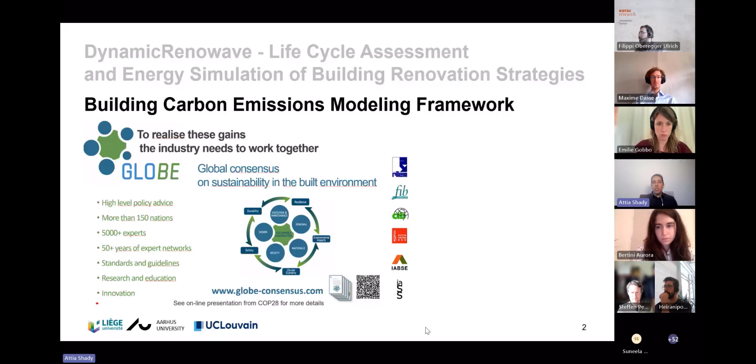Now allow me to give some idea of where we are going and where we are coming from. Like I mentioned earlier, we had our webinar in May where Professor Petersen and myself presented the framework in one of its earlier drafts.

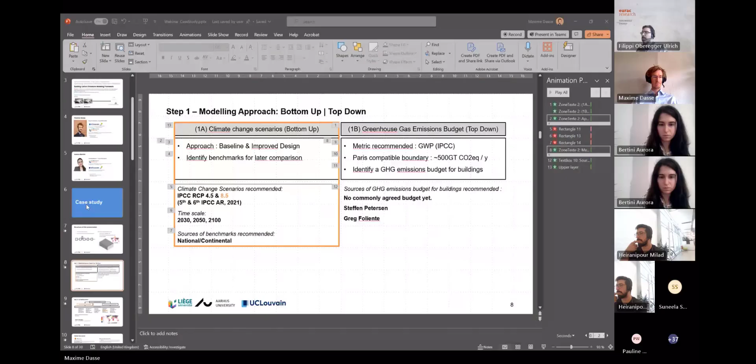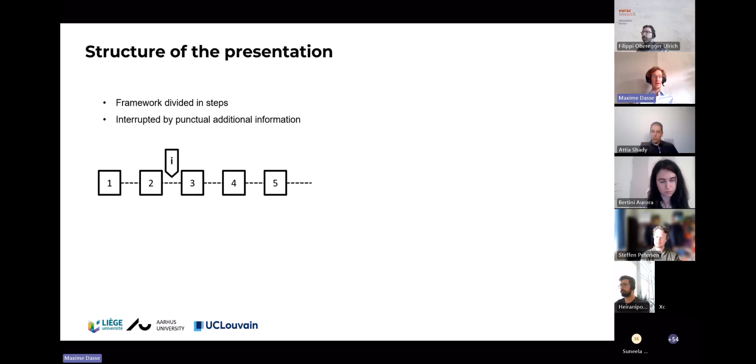Okay, perfect. Good afternoon, evening, morning from wherever you are. It's a pleasure to present the result of our work so far. It's still a work in progress, so we'd be glad to have your feedback and advice on how to improve it. First, I'll give you a tour of the structure of the presentation so you're not lost along the way. The framework is divided into several steps, which will be the same structure for this presentation, interrupted by additional information such as life cycle assessment or weather modeling. A case study will be used to illustrate the application of this framework along the way.

It is based on the BESTEST 600 developed by ASHRAE 140. We simulate a renovation of this case from a poor energy performance to a passive energy performance, all in the Brussels climate, as we are more familiar with this.

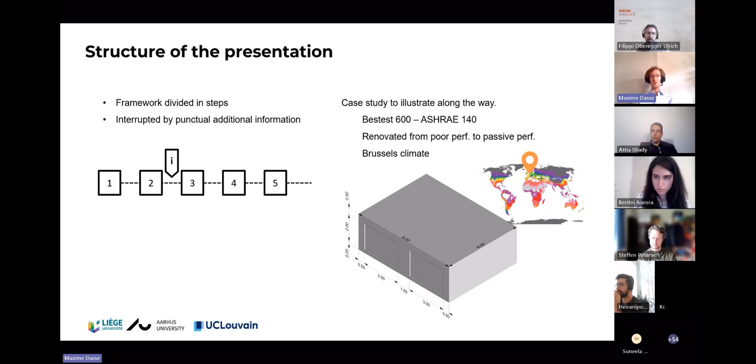So first, the first step is the approach of modeling you are going to use. Two approaches can be used: first, the bottom-up approach based on climate change scenarios, and second, a top-down approach based on greenhouse gas emissions budget, taking the whole planetary boundaries and dividing them to derive a budget for the assessment of buildings.

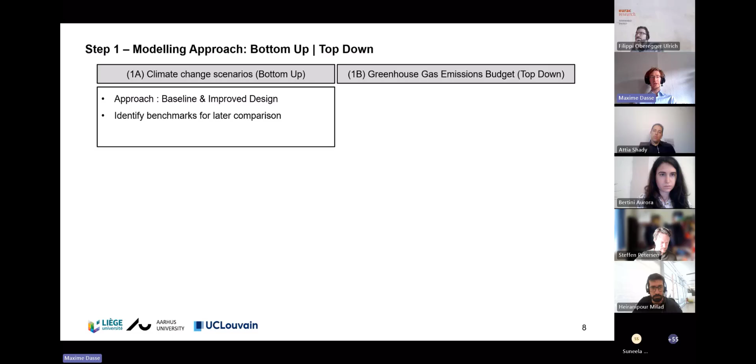For the bottom-up approach, the aim is to have a baseline scenario, then improve the design to have better versions as we go up. It's also important to identify benchmarks for later comparison. This step must be done in the early stages of the assessment to have a comparison point that is as accurate as we want based on the scope of the study.

The different climate change scenarios we recommend are based on the IPCC RCP 4.5 and 8.5, published in the 5th and 6th assessment reports of the IPCC from 2021. The time scales for taking the scenarios are more like 2030, 2050, and 2100.

For the benchmarks, we recommend national or continental sources. We have the EPISCOPE database for Europe, for example, and Tabula as well. But this is really regional, so we recommend that in your own country, you identify sources of benchmarks applicable for the model you are assessing right now.

It's really critical to do both approaches, the bottom-up and the top-down, to have the uncertainty ranges of the results you are going to produce based on this framework.

So for the bottom-up, it's done. For the top-down approach, we recommend the global warming potential metric, as recommended by the IPCC, which generally uses kilograms of CO2 equivalents as a metric.

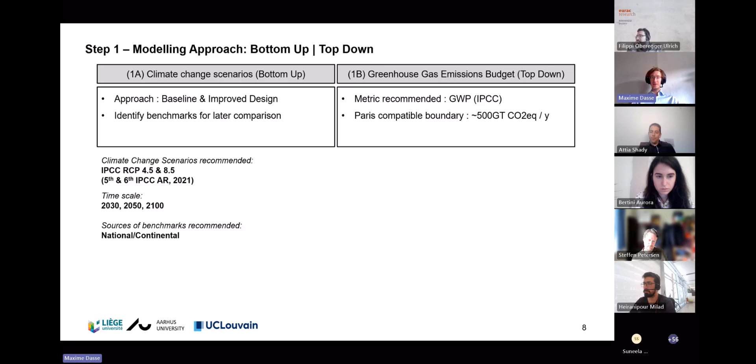You're all familiar, I guess, with the Paris Agreement that aims to limit temperature rise to 1.5 degrees by 2050 and 2 degrees by 2100. This gives us a boundary in terms of CO2 equivalent emissions of 500 gigatons per year. This is the boundary that we divide to identify the GHG emissions budgets for the construction sector, and later for buildings.

This is a difficult task, so for now no commonly agreed budget exists. Nothing is sufficiently advanced to provide exact data on what the budget is for your specific building. However, we have Steffen Petersen collaborating with us, present today, and Greg Foliente, who both work on defining budgets for buildings. I invite you to check their work; it's extremely interesting and really reliable in this context.

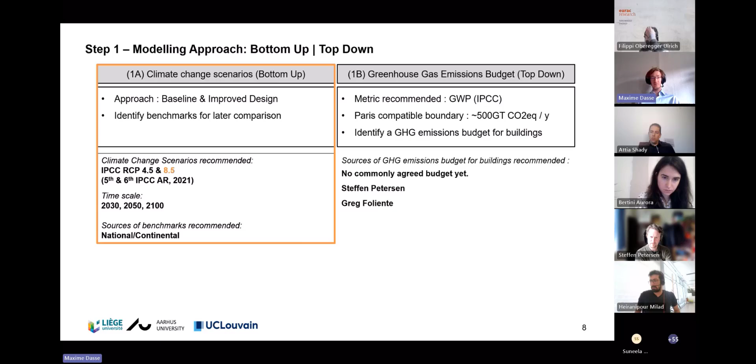For the case study we are modeling here, we will use only the first approach, just because of a matter of time. Otherwise, it would have taken forever to present.

So the second step is identifying the climate, the location. First you have weather data, where you have a choice to make: exclude the urban heat island effect or include it. Based on this choice, you also need to select your city. In our case, it's going to be Brussels, but here are the different cities we recommend based on the standards.

For the weather data, we recommend Meteonorm as a source of weather files to model your climate. For this case study, we chose the weather file for 2020, current let's say, and 2050 in agreement with RCP 8.5, and also the file for 2100.

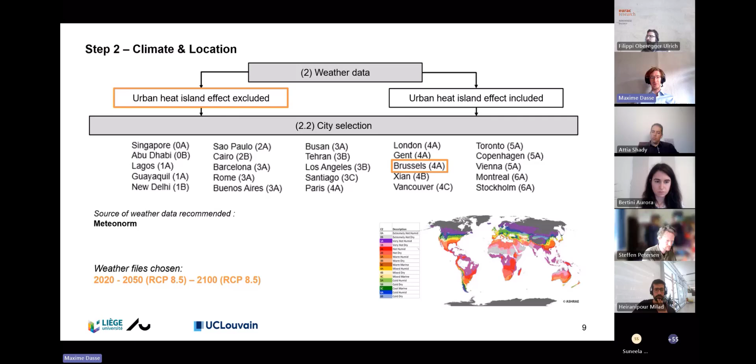For the weather data sources, some additional information about Meteonorm. Meteonorm is a global project that aims to provide climate data for lots of points on the planet.

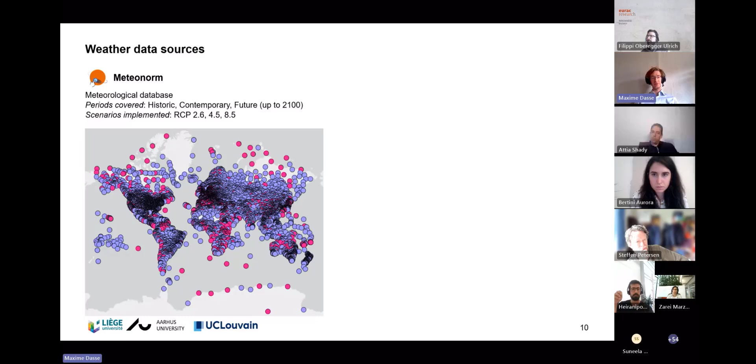Here is the map of all the points that they currently provide. They cover different periods: historic, past, contemporary, and future, up to 2100. They currently implement the IPCC scenarios RCP 2.6, 4.5, and 8.5.

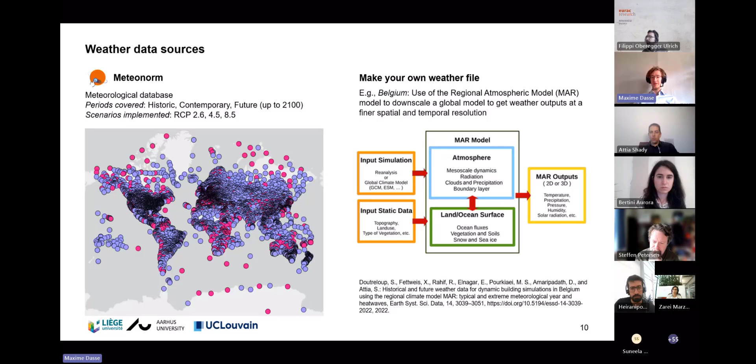If you can't find your own weather data, we advise you to model your own weather file using the approach derived from a paper by Doutreloup et al., which consists of taking a global model and downscaling it to the scope you want. It may be local, regional, or even continental. We invite you to check the reference.

Step 3 is characterizing the actual building you are modeling. It starts with the functions you want to model, with their occupancy schedule. Here are the different occupancies that we recommend. For the schedules of those occupancies, you can check ASHRAE 189 and ISO 17772, which are reliable sources of schedules to model for energy performance.

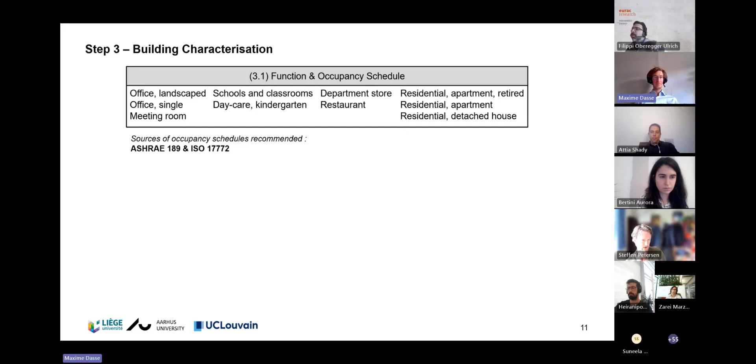Then you have the geometry to define. You can choose between taking a real building as a case study, which is the more complex option, or a more simplistic approach, processing room per room with a shoebox approach. It is either residential, which will be multi-zonal, or single zone.

For our case study, we take this approach with the BESTEST 600, which we recommend as a benchmark case study.

The first step is defining the structure and finishes, the material step. We'll leave the building envelope for a bit later. For structure and finishes, we propose choosing between three possible options: a light structure, a medium structure, or a heavy structure.

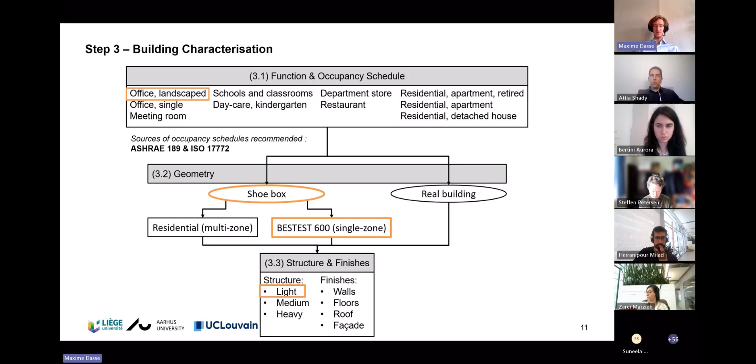For the finishes, pay attention to consider the finishes of all the pertinent building elements. In our case, we are going to take a landscaped office and model a shoebox based on the BESTEST 600 with a light structure, a wood frame in this case.

A bit more detail about the different sub-steps. First, the geometry: here are the dimensions of the BESTEST 600 that we remodeled for this occasion. We recommend that you base your models on archetypes that are as local as possible.

We don't have archetypes for everywhere, but we are developing an archetype database for Belgium in the SBD lab, so probably some researchers are doing the same for your own countries or regions. You should base your models on archetypes as close as possible to what you want, with dimensions as a function of the surface needed, based on the program and the number of people you are modeling.

Pay attention to choosing between single zone or multi-zone. Multi-zone can be highly complex, but it is more detailed and more realistic in some sense, whereas single zone is a much more simplistic approach.

Then, of course, pay attention to adjacencies and orientations. If you model a single zone, you will have to model very carefully the adjacencies of this zone - whether it bounds the outside of the building or just another room, which is then probably adiabatic.

For the orientations, we suggest you take the worst case scenario, which gives you the low boundary for your research. It can only improve after that.

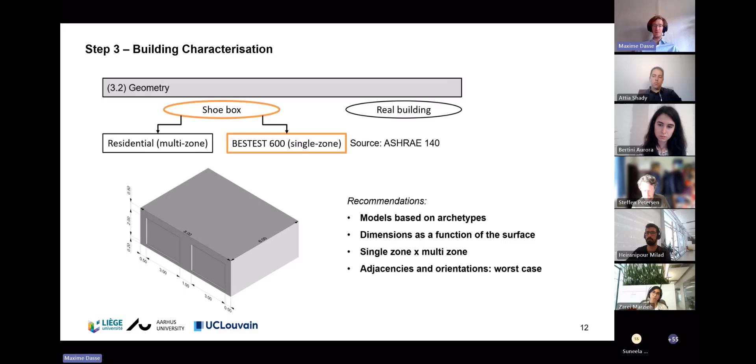For the third sub-step, the materials, we take a light structure, a timber frame structure. We are aware that simplifying the structure into only three levels can be a bit too simplistic, but each structure must represent a constructive system that is accurate, so the model has some precision to be accurate in your results.

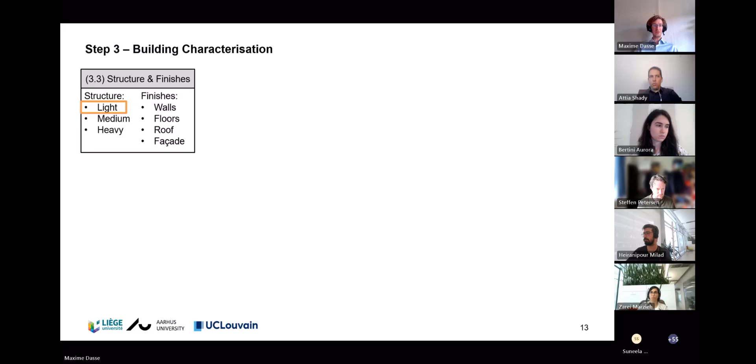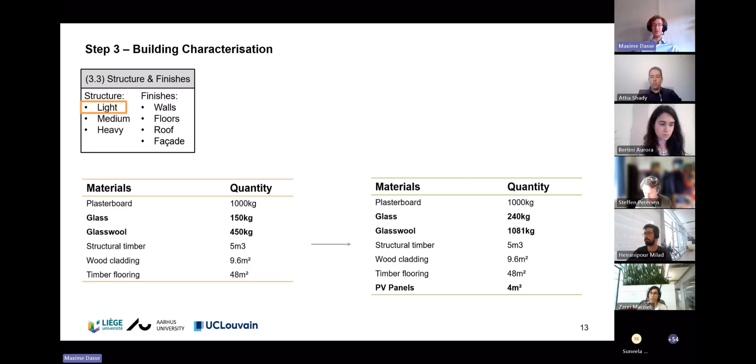In this case, for the case study, we took a timber frame with the quantities modeled here, and we renovated it to improve performance. We almost doubled the insulation thickness in the glass wool, went from single glazing windows to double glazing windows, and added PV panels on top of the case study to produce its own energy and reduce the operational burden.

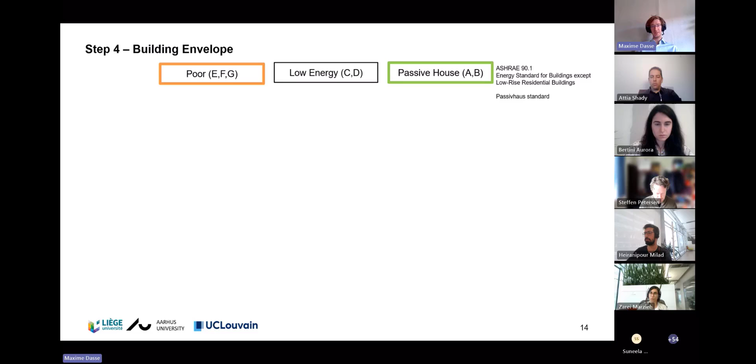For our building envelope, we go from poor energy performance to passive house standards, based on the German passive house standard.

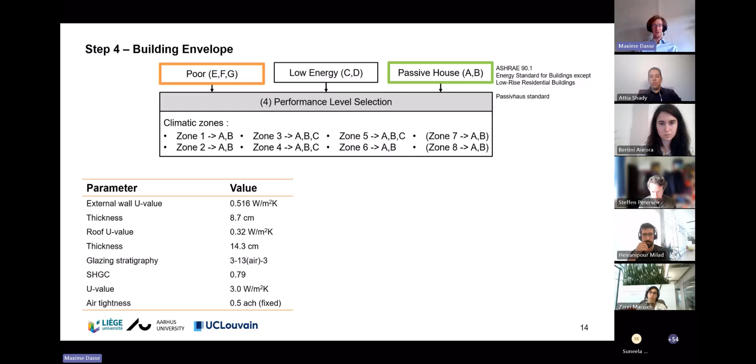For the performance level selection, which is the heart of the 4th step, you should choose your desired performance level based on the climate you are modeling and located in. For extreme climates, it's more difficult to achieve low performance because the comfort limits are higher. Typically for Alaska, zone 7 and 8, you can't reach a certain level because you need to be extremely performant.

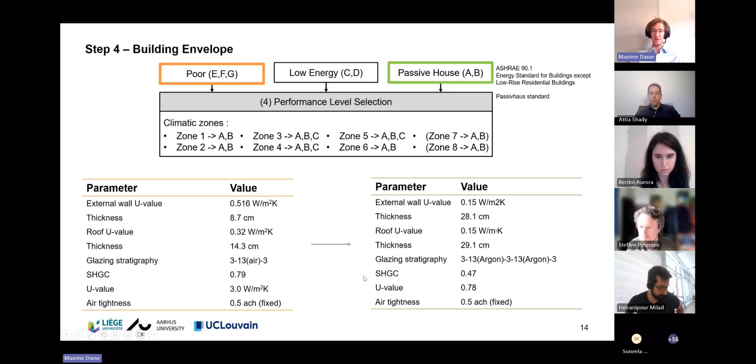Here for the materials, you have the parameters, and here the initial parameters - I'm not going to detail all of them. With the actual new performance we achieve, you see we have a very decreased U value, which goes from 0.5 to 0.15.

Once those steps are completed, once you are at the end of step 4, it is time to start thinking about the coupling of embodied emissions and operational emissions.

We recommend for a full life cycle assessment that you take stages A to C. We exclude stage D because of the uncertainty linked to it - we assume it is not mature enough right now to produce reliable data for the calculation. We prefer to restrain the scope to A to C. The embodied stages are the ones in green, so the full A stage, A1 to 5, and B4 and 5. We do not include use, maintenance, and repair because the data is too uncertain in some sort. We also include the whole C stage.

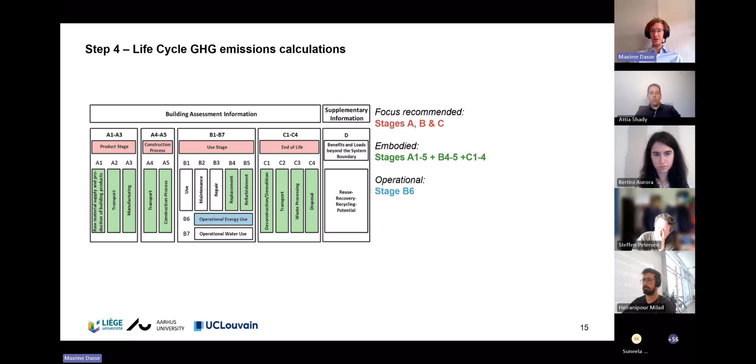For the operational energy, B6 is sufficient, but of course if you have additional data, you should do the most that you can. If you follow these steps, it's already very good, but if you can go further, it's always encouraged to try and go further.

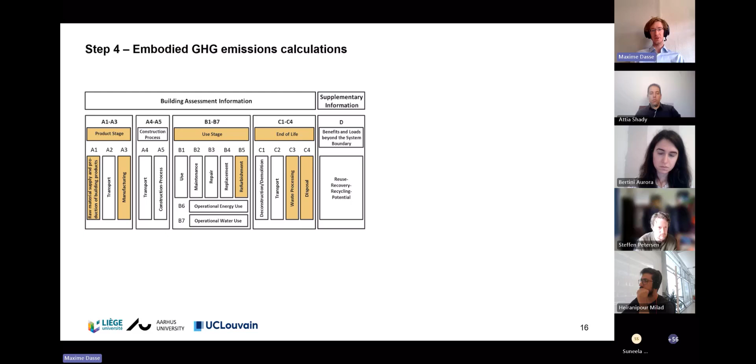Here for the embodied stage, once we have defined the materials, we can start calculating it. For the case study, we take only stage A1 and 3, stage B5, but also the end of life with C3 and C4.

To perform it, we recommend that you use EcoInvent, preferentially with Brightway and Activity Browser. If you don't know EcoInvent, this is a very well reputed, very popular database based on a process approach that helps model the life cycle of various elements, not only buildings. It is not building-oriented, it is generalistic, but the result is still accurate enough to model for buildings.

Brightway is a Python package that can be used to bridge Python and EcoInvent. It is extremely powerful, acting as a database manager that can create new databases based on EcoInvent processes, which is useful to model your actual case studies, link it to everything, and do it in a parameterized way, which is much more efficient. Activity Browser is kind of an interface placed on top of Brightway, which allows you to have a visual interface instead of a script one. It is very powerful, but quite recent and not completely finished right now - there are still some bugs, but for basic calculation, it is extremely powerful.

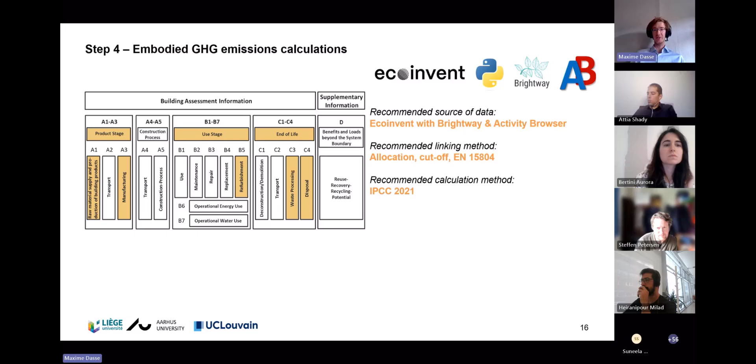For the allocation, for the linking method of the different processes of EcoInvent, we recommend that you follow the standards. EcoInvent proposes a linking system model based on EN 15804, which is quite close to the allocation cutoff model they also propose, but more closely aligned to the standard. For the calculation method, many are available, but we recommend you follow the IPCC. The IPCC produced a calculation method in 2021, which is implemented in EcoInvent and most other databases, so we recommend this calculation method.

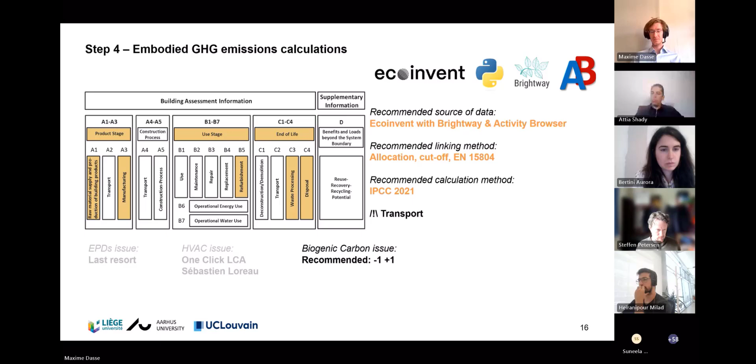And finally, the last issue is the data type. This is still a big issue for the results of life cycle assessment. You may not notice, but LCA databases are usually based on one of two approaches: either process-based, which is the case of EcoInvent, or input-output, which is a top-down approach. It is proven that these two approaches can produce very different results, and so it is recommended to try and find hybrid data.

But currently, the only hybrid database that exists for buildings is the EPIC database, produced for the Australian building stock, so it is reliable only to some extent. Some projects, like the work of Fabian Prideaux, are currently trying to extend it to Europe, but it is still a work in progress. For now, EcoInvent still is the best choice, while waiting for an extension of those databases.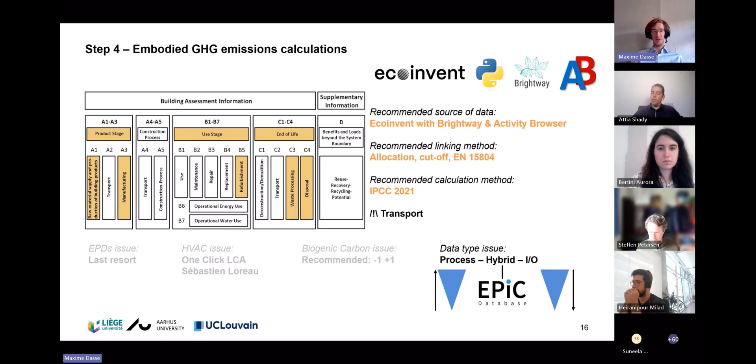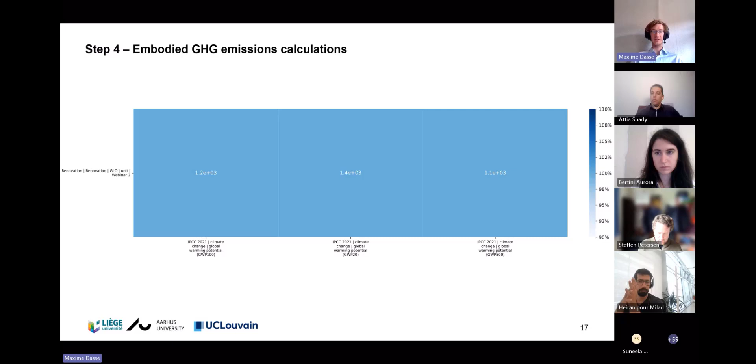After all these calculations, with the case study that we took, we arrived at these results for the global warming potential with 3 possible scenarios. So you see that just for the renovation of only one small case study, one room of 48 square meters, we can already reach 1.2 tons of CO2 equivalents released into the atmosphere just to produce the insulation, the glazing, and the PV panels. Now I will leave the floor to Aurora Bertini, who is going to present the HVAC system, the operational part.

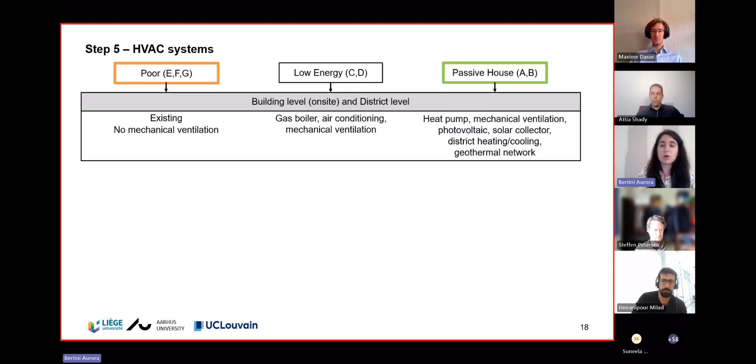In this case, we start with a condition with a gas boiler with a COP of 0.85. There is natural ventilation, but not mechanical ventilation, and there are no renewables. So we suggest a renovation with

an air-to-water heat pump with a COP of 4.5. Natural ventilation is considered too, but with some constraints in terms of temperature.

So natural ventilation can be used in the intermediate season, like spring and autumn, so that it has a lower impact on heating energy use. In the heating season, natural ventilation is substituted with mechanical ventilation.

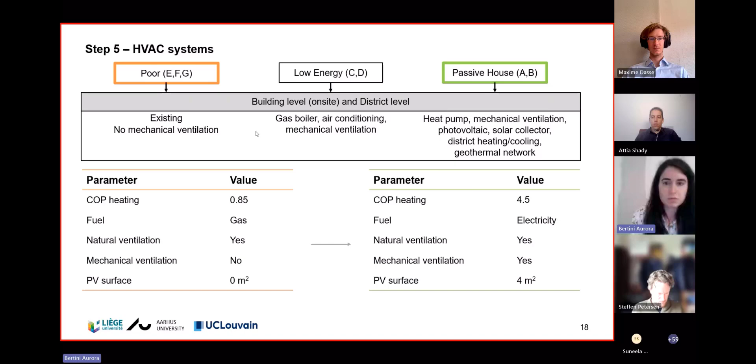And finally, we introduce PV panels with a surface of 4 square meters. So now we have all the inputs to run the simulations, including all the inputs for the building energy model. So we can move to the calculation of the operational greenhouse gas emissions.

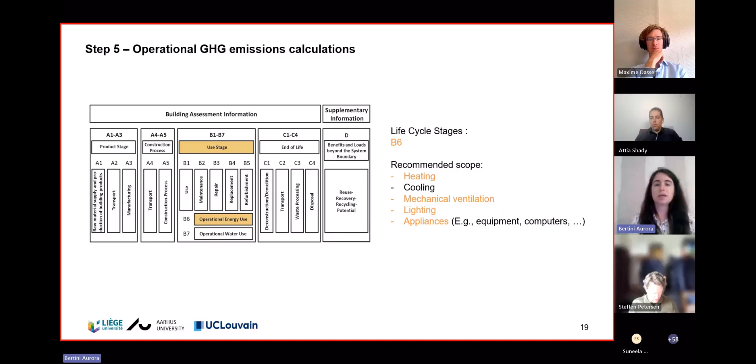In this case, we decided to focus mainly on step B6, the operational energy use. To make this calculation, what we need is the heating, cooling, mechanical ventilation, lighting, and appliances energy uses. Since we made the hypothesis of not having a cooling system, we will only take heating, mechanical ventilation, and lighting and appliances.

There are other parameters that can be included in the model that we did not model in our case study because they are, let's say, recent in terms of technology development. These are, for example, the case of storage. We can have, as technologies, water tanks, phase change materials, and batteries and fuel cells, used all as thermal or energy storage.

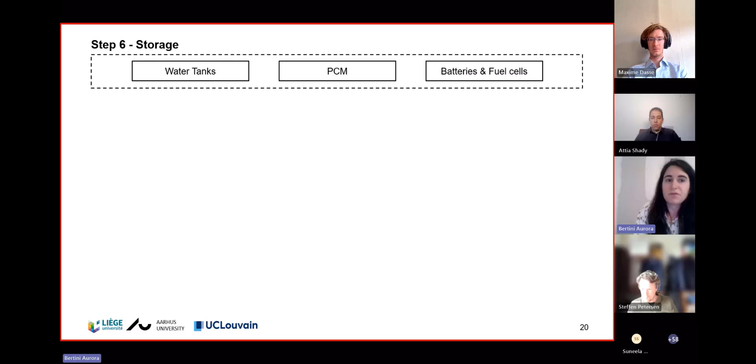In the case of water tanks, nowadays they are coupled with solar energy and heat pumps to produce hot water. If we want to include them in the model of our building, what is important to consider as parameters is the volume and the hot water temperature, which are related to the quantity of energy we can store, and the tank insulation, which is related to the losses of our tank, and also the time period for which we will have the storage of the energy.

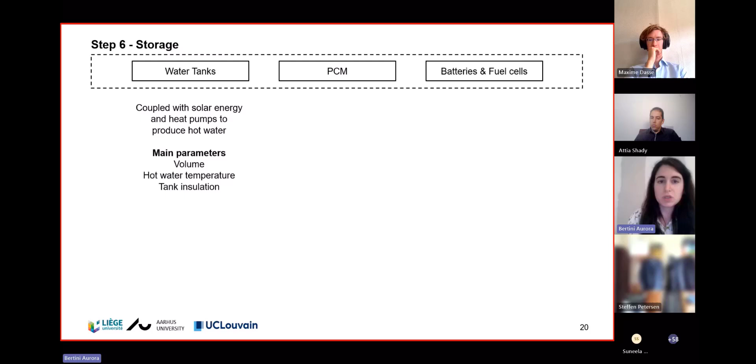Another technology we can consider and include in the building is phase change materials. Phase change materials can be used to minimize the variation in electricity energy use between day and night. There are two different groups we can have: passive and active.

In the case of passive, we don't have any additional energy consumption, because some examples are the fact that these phase change materials are mixed within the composition of gypsum wallboard or within the concrete to increase their thermal storage capacity.

Phase change materials can also be active, and they can be included, for example, in the stratigraphy of the PV panels or in floor heating systems.

And finally, another solution we have is batteries and fuel cells. Batteries are usually used for short-term energy storage, while hydrogen is used for long-term energy storage. Nowadays, they can be coupled with PV panels.

For example, it is possible to produce hydrogen during summer when we should have a lot of sun, and it is possible to store this hydrogen and use it during winter when we don't have a lot of sun, when battery storage is poor.

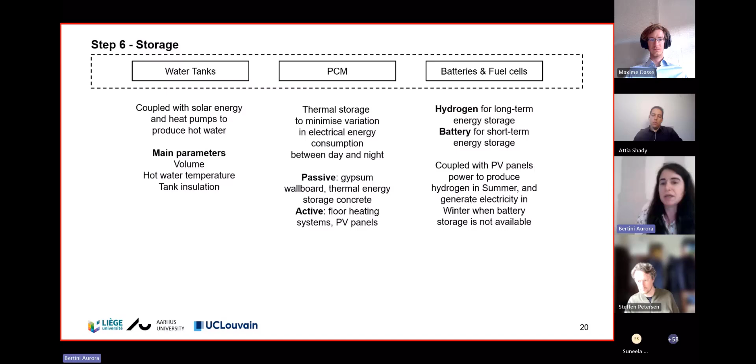Other parameters that can be included and considered are the ones related to the energy mix. What we can observe is that the energy mix can vary during time, and this variation depends also on the policies that governments can adopt. The more we aim to reduce greenhouse gas emissions, and the more the policies are in that sense, the higher is the contribution of renewables in our energy mixes. It is important to consider the evolution of the energy mix in the calculation, because this variation has an impact on the calculation of the greenhouse gas emissions, both operational and embodied.

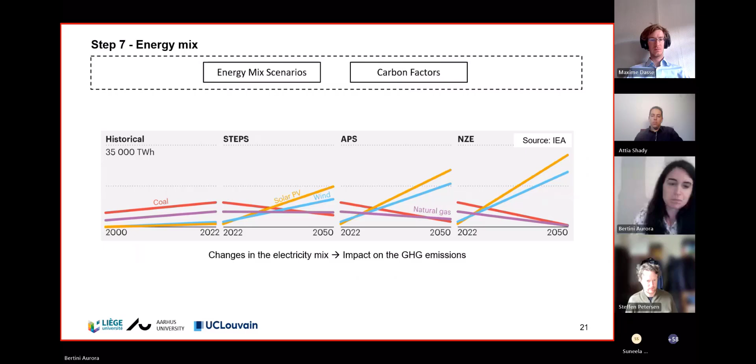The other parameters that can be considered are the carbon tax and the carbon threshold, because we are moving towards a context where we are fixing some carbon caps, emission caps. This is the case, for example, of Europe, where a trading system for emissions has been introduced. It is a sort of market mechanism where CO2 has a price, and Europe fixes a cap of emissions, and companies have to buy allowance for every ton of CO2 they emit per year. This allowance can be exchanged between companies, and the aim is to reduce greenhouse gas emissions in Europe.

Before this approach, this carbon market was mainly adopted for power generation and energy intensive industries, like the ones producing iron. But from 2027, it will be introduced also for buildings. So that's why it is important to consider this aspect also in our work.

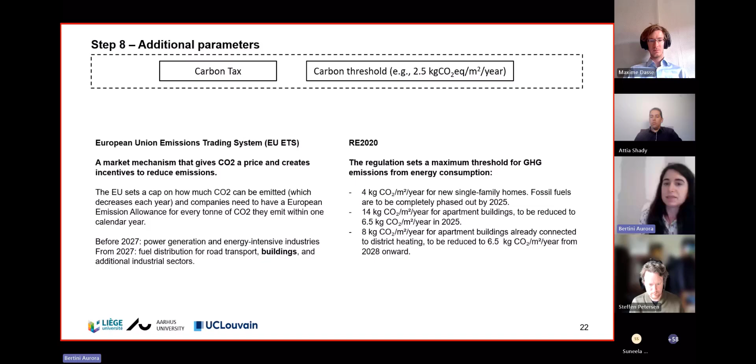Related to carbon threshold, for example, we can mention RE 2020, which is fixing a greenhouse gas emission threshold for energy consumption. This threshold depends on the type of building we are considering. So it is different for single-family houses, apartments, and it is also different if we include district heating within the building systems.

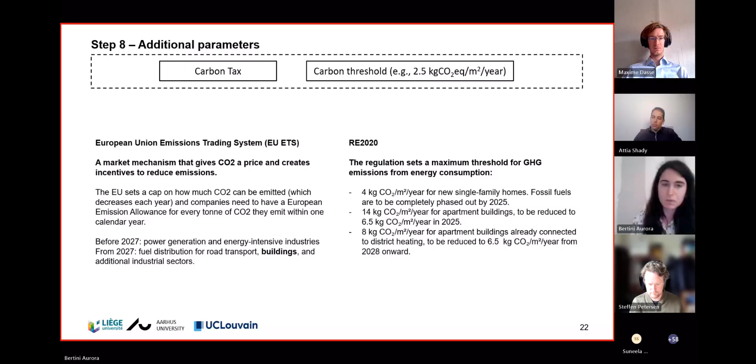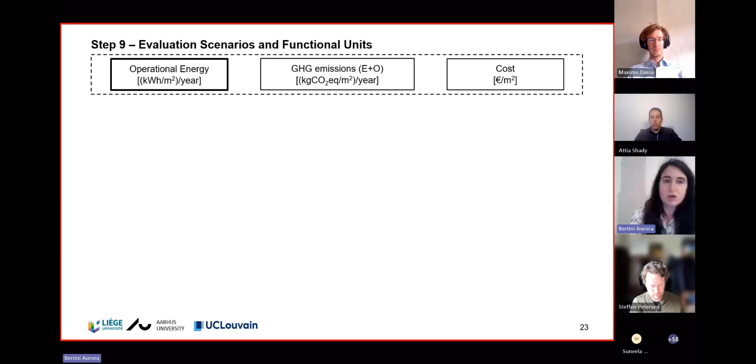Now we can move to the last step of the framework, that is the evaluation of the scenarios. We have identified three main indicators to evaluate the scenarios: the operational energy, the greenhouse gas emissions, and the cost. Today we will mainly focus on operational energy and greenhouse gas emissions, and we won't consider the cost too. In terms of operational energy, one of the metrics that we can consider is the energy use intensity.

If we analyze the results that we have obtained for this simple case study, what we can see is that effectively the renovation allows us to reduce the heating energy use of the building. And it is possible also to generate electricity on site, that is the yellow part of the graph.

We can also observe that the energy use intensity for heating is reduced moving towards the end of the century. This is because of the rise of global temperatures. From this trend, we can insist on the importance of making simulations using different weather files that consider also the climate change effects, because renovations have to be robust and consider their effectiveness in the long term. So we have to consider also the 2050 and end of century performance.

Another metric that we can use to evaluate the operational energy is the primary energy. In this case, we mainly focus on the net primary energy. We can observe that while in terms of energy use, the difference between the base case and the renovation scenario is very high, in terms of primary energy, it is not the case.

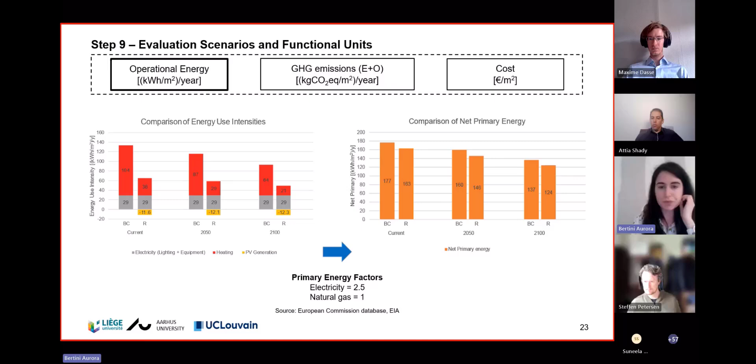In terms of greenhouse gas emissions, from the results of the energy use intensity, knowing the emission factors, we can calculate the operational greenhouse gas emissions. As we were expecting, the emissions are reduced compared to the base case, mainly because we have a reduction in the heating energy use intensity. Of course, these results depend on the emission factors, and in this case, we considered the Belgian energy mix. These results can vary according to the country we are analyzing.

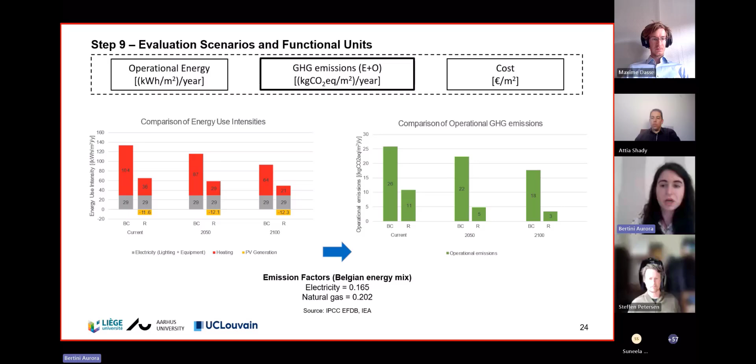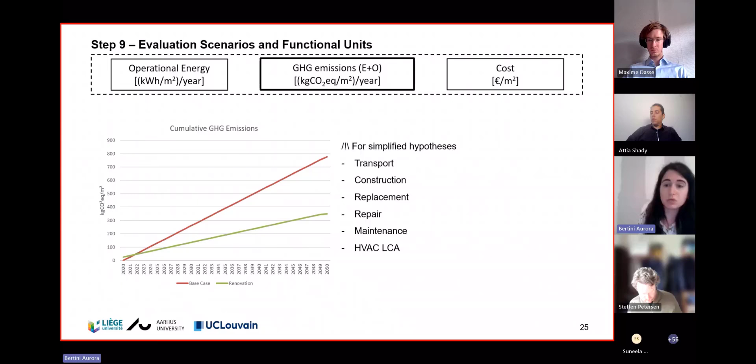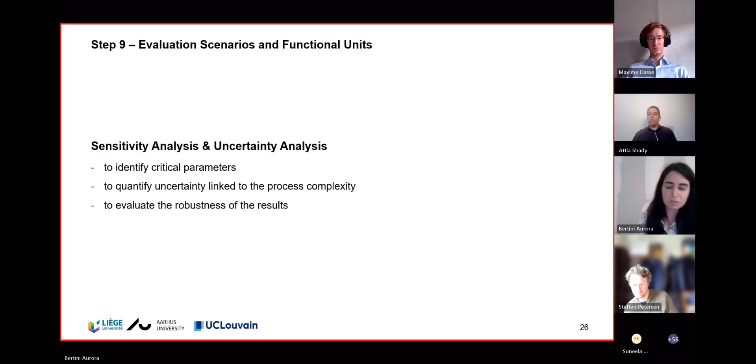So with this, I conclude the presentation. I just want to remind that this is a framework that, as was said at the beginning, is a work in progress. We presented it in our first webinar, and now we shared an example of application. But yes, it is a work in progress, and we are open to all your feedback and suggestions to improve it. So thank you very much.

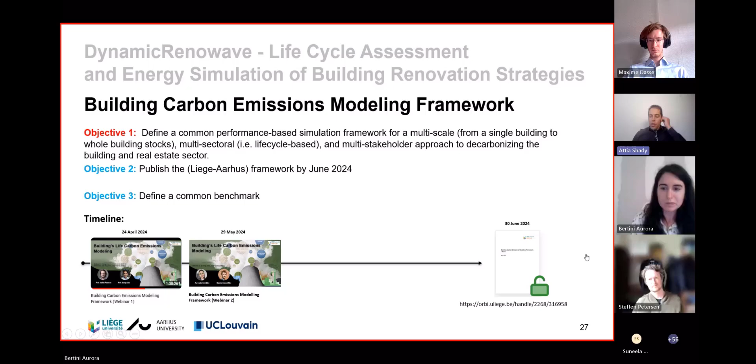Thank you very much. The presentation really provided new insights, and you managed to push the earlier initial framework. So it's now time for Q&A. I invite all participants to get engaged. Don't hesitate to write your comments in the chat. We will read the chat in order. But maybe I think Professor Steffen Petersen had two comments already. We can start with him to initiate the Q&A.

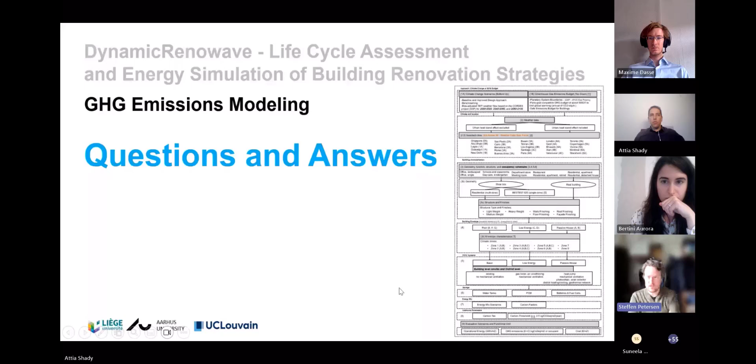So Steffen, sure. Thank you very much, Shady. And thanks to the presenters. That was excellent and really, really interesting. I had a lot of notes on different things. I was just putting in a few comments along the way regarding the weather data. You recommended Meteonorm, and I've also been using that a lot. I think there are various sources you can get this data from, and I put a few more into the chat where it's free, and you can just go and download these things, and that's at least what we do.

So there's always a discussion about which scenario should we use. Is it 4.5 or 8.5 or whatever? What are you thinking about that, presenters, regarding climate change scenarios and developing risk scenarios based on that? What is your take on that? Could you elaborate a little bit?

Maxime or Aurora, would you like to take this? If not, you can shuffle it to me. No, I'm just not sure if I understood the question. So the question was, in the IPCC scenarios, there's RCP 4.5, 8.5, and so on, these socio-economic models of different projections of what might happen in the future. So the question was, what is your take on choosing one of those, if this is correct, Steffen?

Yeah, exactly. Actually, in this example, we decided to choose the worst one, the 8.5, because considering the current global situation, we think that is the most likely to happen. So we decided to go for that, and it's somehow conservative because it's the worst scenario we can have. Yeah, you're absolutely right, and I agree with that. I think that's a very good rationale, and I was expecting to hear that.